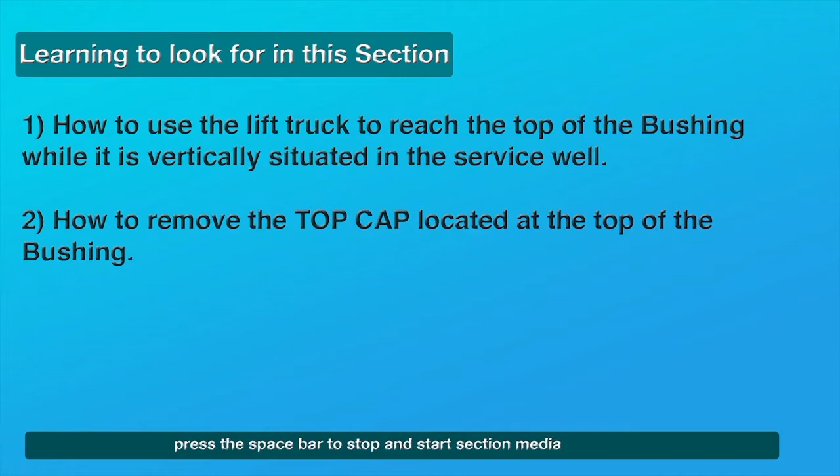Wearing a safety harness, position a scissor lift vehicle just to the edge of the metal floor covering in front of the bushing, so that all of the weight of the lift is on the cement floor.

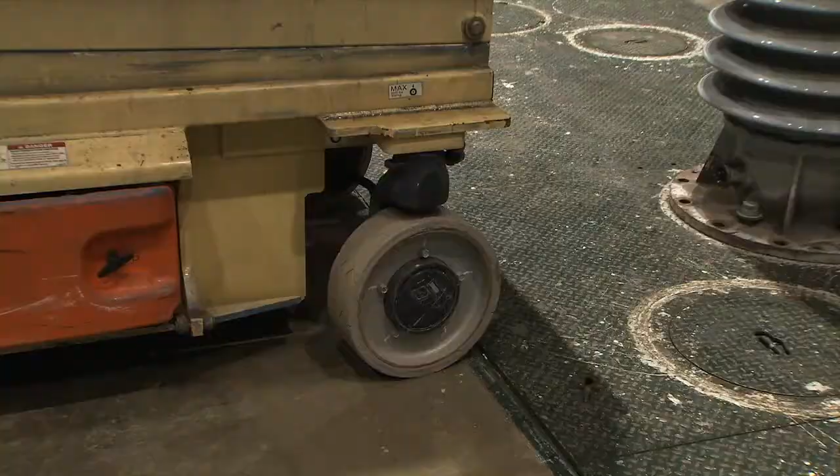Using the handles located on the upper railing of the platform, extend the working platform towards the bushing so that there is a safe and comfortable working distance between the porcelain on the bushing and the platform. Attach the hook of the lanyard on the safety harness to the anchor point on the main railing before stepping

onto the extension platform. Check again to ensure that the scissor lift vehicle is positioned between the metal floor and the yellow line on the concrete floor. The front wheels of the vehicle should not be touching the metal floor.

Using the control panel mounted on the railing, begin raising the working platform. He's raising the skyjack now. He's going to raise the platform to a position where it will be safe and comfortable to work at the level of the bushing where the terminal is located.

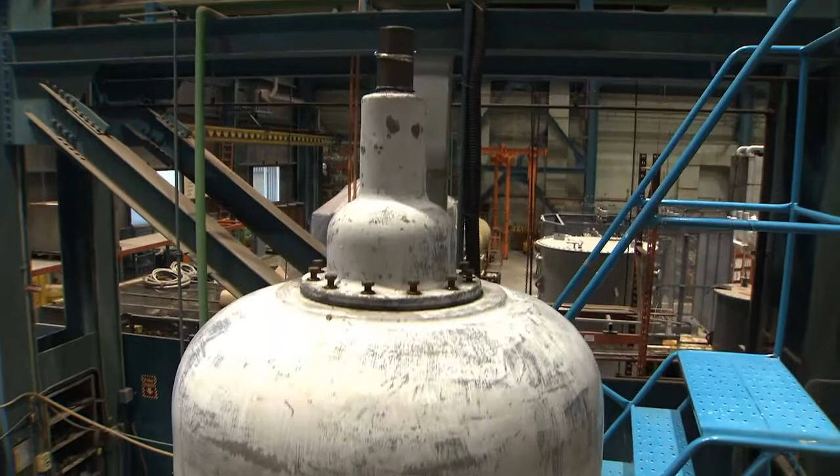Using the appropriate size ratchet wrench, begin loosening the bolts at the base of the terminal that secure it to the oil reservoir tank. When all the bolts are loosened, manually remove both the bolts and the washers, then set them aside for future use.

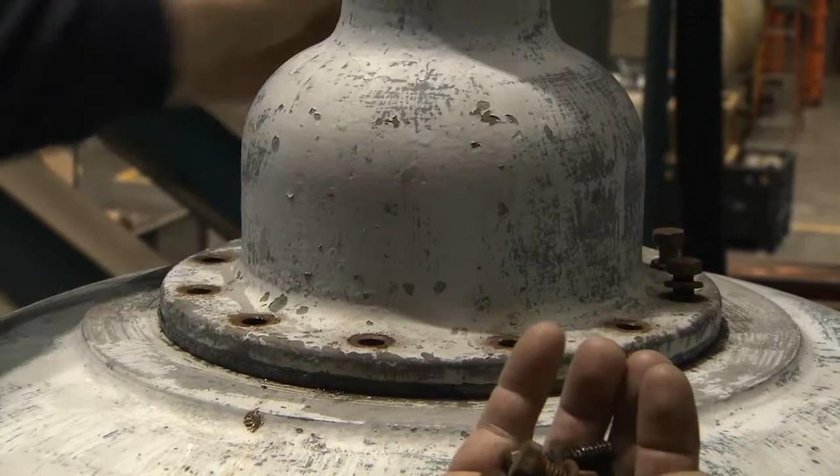Lift the terminal off of the top of the bushing and set it on the surface of the working platform. The draw lead conductor from the transformer extends through the center of the bushing inside the conductor core to make contact with the terminal at the top of the bushing.

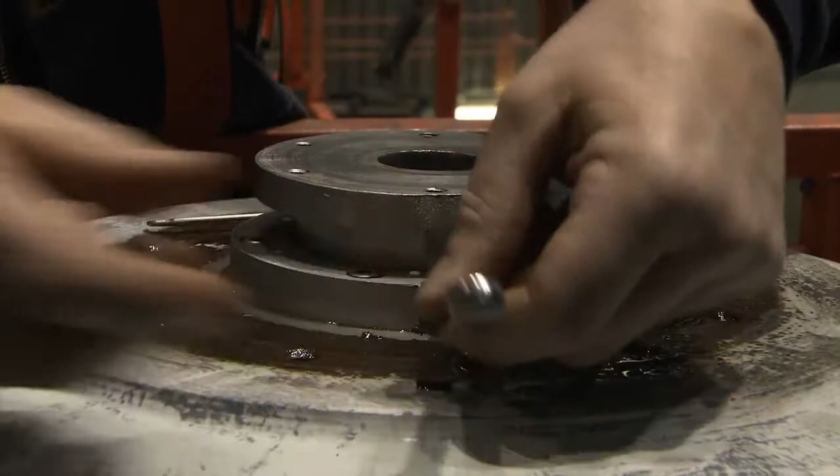Lifting the bushing out of the service well, moving it north toward the scrap oil tank. While on the working platform of the scissor lift, use an open-end wrench, in this case 3/8 inches, to loosen the plug on the top of the oil reservoir tank, situated at the top of the bushing.

The plug lies within a notch in the neck of the metal collar, under the flange attached to the conductor core. Once loosened, manually remove it and safely store it for future use. The plug is for an outlet that can be used in several different ways depending on the circumstances. In this case, it must be removed to replace the volume of air that the oil will displace when the

bushing is drained. Over time, the gasket at the bottom of the plug will break down in the presence of oil and higher temperatures. Use a screwdriver as needed to clean away and remove any pieces of the old gasket that remain at the base of the threads.

Choke one sling around the bushing above the first shed and below the oil reservoir by looping one end of the sling through the opposite end, and then tightening it to choke the bushing. Probably only about 200 to 300 pounds of pressure on that sling.

Choke a second sling on top of the first sling and tighten so that the free end is positioned exactly opposite the free end of the first sling. Raise the platform of the skyjack. Arrange the two loose ends so that they are resting on top of the oil reservoir.

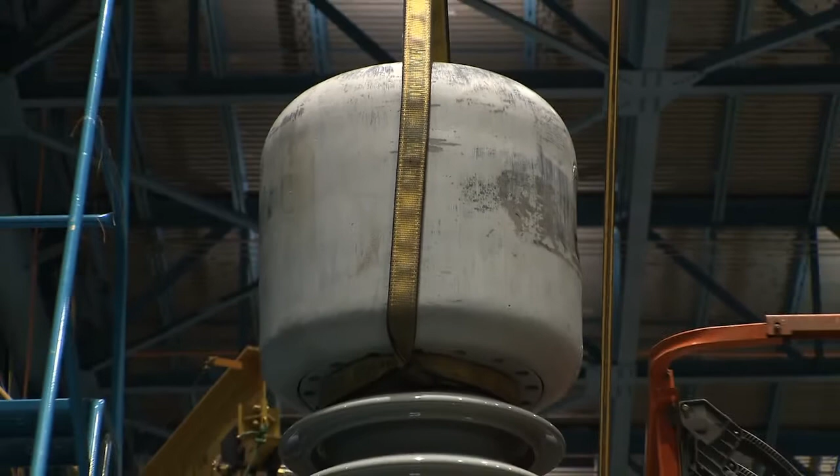The crane operator should slowly remove any slack in the slings and raise the bushing for the sole purpose of determining whether there will be an even distribution of weight when fully lifted. If the bushing tilts when lifted slightly, adjust the position of the slings accordingly to ensure an even distribution of weight. Pretty good there, Lloyd.

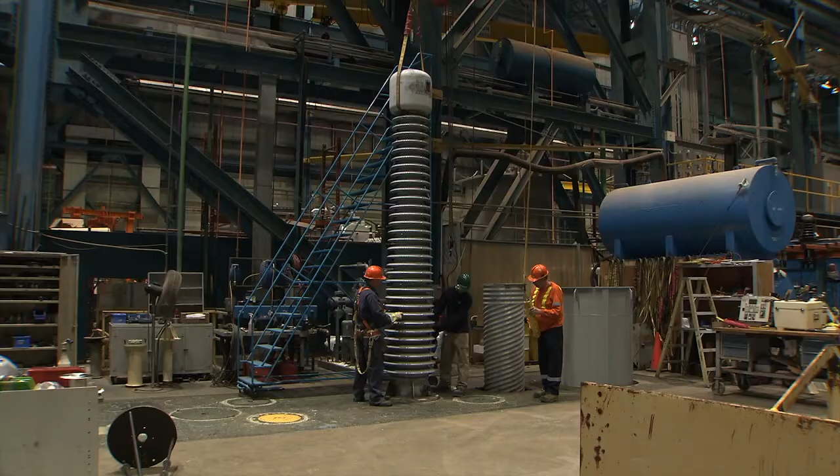When the bushing is lifted just barely off the ground and it remains straight without shifting, the slings are in proper alignment. Just barely touching the floor right now. Prior to lifting the bushing, remove the scissor lift from the area and ensure that there are 2 team members at the base of the bushing.

As the bushing is lifted, 1 team member should guide the unit as it rises to prevent any contact of the lower porcelain with the sides of the service well. Yep. Slowly lift the bushing straight up until the bottom is approximately 1 foot above the floor.

Okay, I'm clear there? Yep. All right. Okay, we're going to start heading north. And slowly begin moving it to the north a few feet and then stopping. As soon as possible, the other team members should put the cover back on the service well.

Begin moving the bushing northbound again toward the blue scrap oil storage tank. Both team members should gently guide the moving bushing with both hands on the flange or the ground sleeve below it. Okay, going north. Move the bushing to within approximately 2 feet of the scrap oil storage tank. Stop the movement.

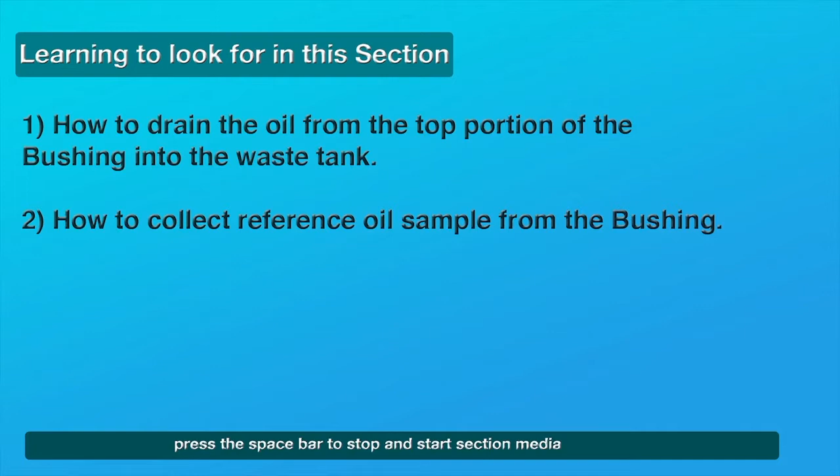Draining the oil from the upper part of the bushing and taking an oil sample for analysis. The tank used to store scrap oil is located at the north end of the bushing shop and has a large circular opening at the top of the tank into which scrap oil from the bushing will be drained.

Using the appropriate size socket wrench, loosen the nuts that hold the cover to the oil sample valve in place. Once loose, manually remove them and store in a safe place for future use. Loosen the cap manually to reduce the amount of adhesion due to the amount of debris mixed with oil that has hardened over the bushing while it was in service.

Place an oil-absorbent cloth beneath the valve before removing the cover to absorb any oil that may flow out when the cap is removed. Unscrew the remaining loosened bolts by hand and remove the cap so that the valve is now accessible. In this case, the valve is a quick connect type, similar to one used in a compressed air line.

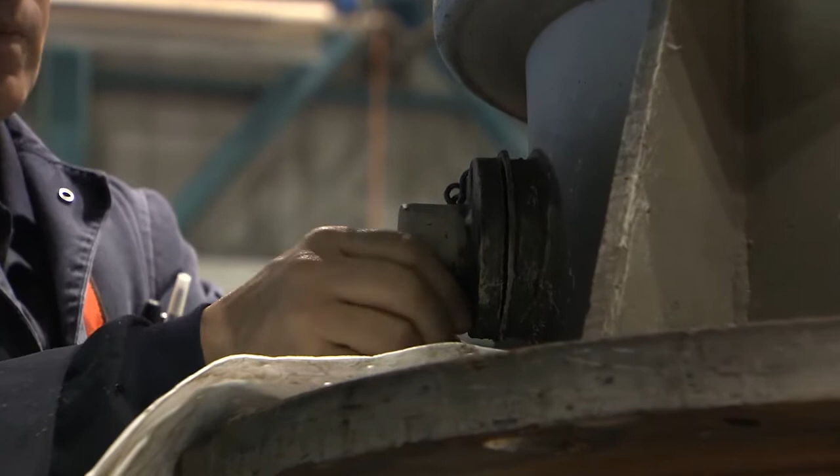Yeah. Now this is one of those things where, actually now you can see the connection there. It's just like a quick connect for an airline.

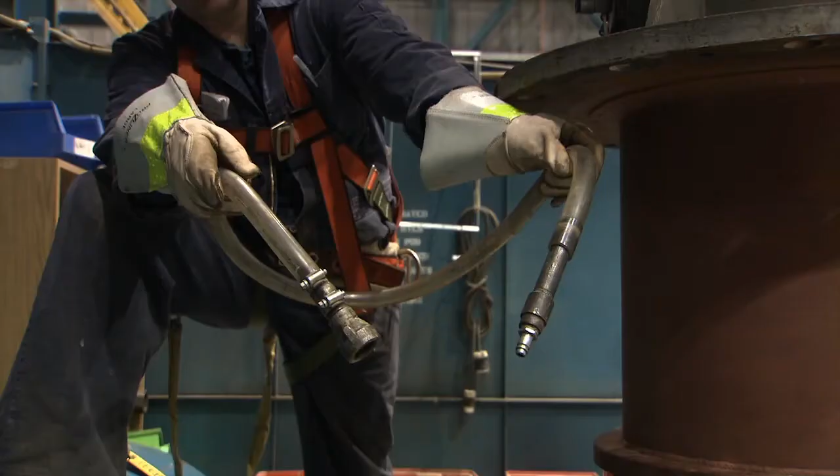One end of the hose used to drain the oil will be inserted into the scrap oil tank, such that it just remains resting on the side of the opening. The other end of the hose is equipped with a connector that will snap into the quick connect fitting on the flange. When the connection has been made, check to see if there is oil flow inside the hose.

So if it doesn't fit, you have different... Yeah, we're good. It's gotta fit. Yeah, now you can see the oil flowing out if you want.

If the oil is flowing out at a steady rate, check on the integrity of the connection by pulling back on the hose. The oil will drain into the tank while it remains upright, supported by the slings and resting on the plywood support at the bottom. Look from this end and then down. And just follow it down to the other end. That's good.

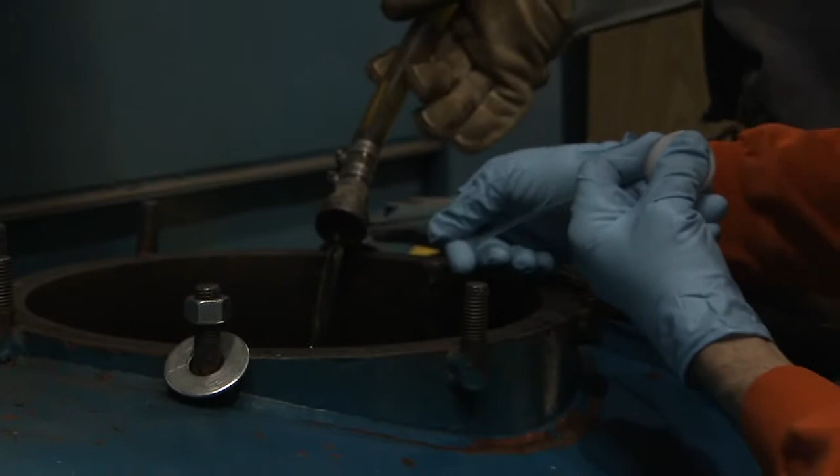While wearing appropriate gloves and using a plastic sample bottle equipped with a length of clear plastic tubing, withdraw a sample of the oil as it flows into the scrap oil tank. Depress the bottom of the plastic bottle while simultaneously immersing the end of the plastic tubing into the stream of oil draining out of the hose.

By letting the bottle expand, the oil will be pulled through the tubing and into the bottle. Draw off enough oil to nearly fill the plastic sample bottle. Transfer the oil to a clear glass vial that has been wrapped with tape so that it can be labeled. Fill the vial to the top before screwing the top on.

And that's it. So now I'm just going to take this cap, we're going to seal it. Just leave it there. Okay. And that's our oil sample for this bushing. Using a permanent marker, write the serial number of the bushing on the tape wrapped around the vial.

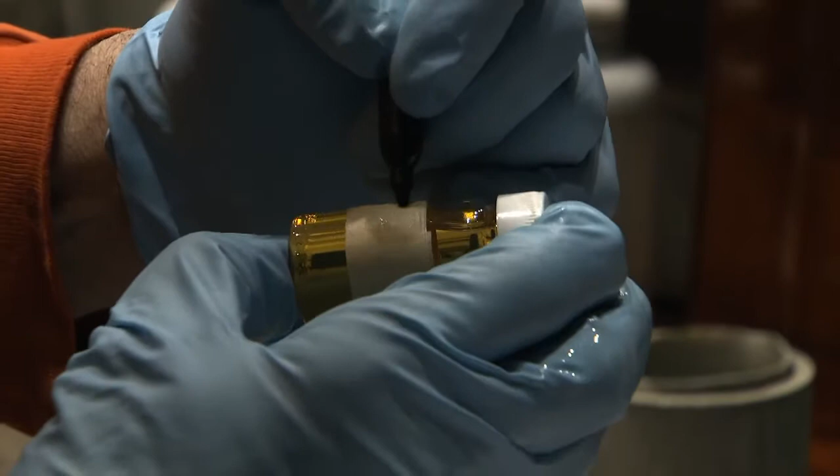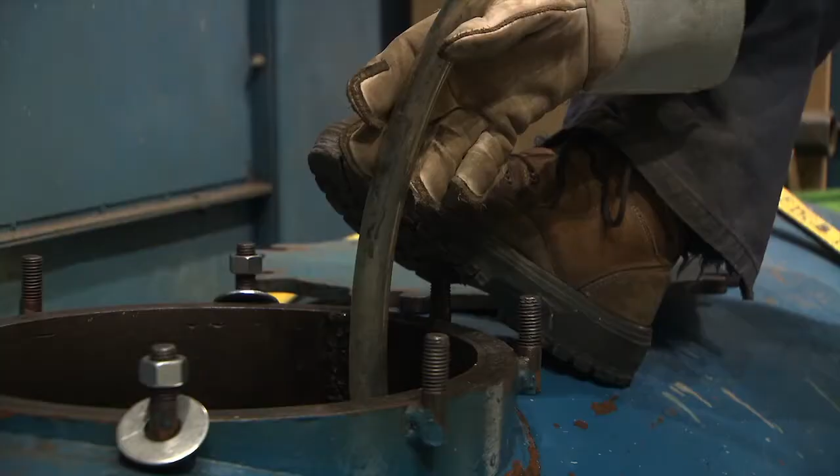And that's it. Just like that. Hold it real still there. And just rotate it. Yep. Good. Check to see if the oil has fully drained from the top half of the bushing by inspecting the end of the hose.

And go ahead. When the flow has stopped, disconnect the hose from the bushing and lay some absorbent towels under the quick connect valve to prevent any residual oil from accumulating. Right.

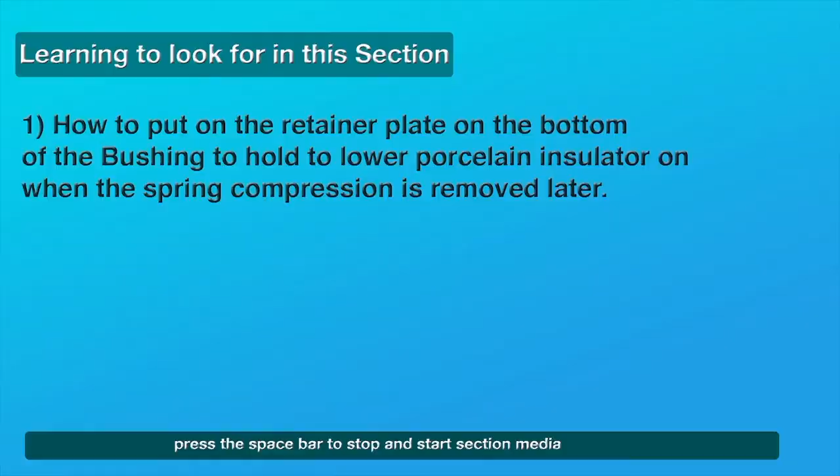Attaching the retainer plate to the flange to support the lower porcelain after the compression system is removed. After the oil in the top half of the bushing has been drained and a sample has been taken for testing, the bushing can be raised up off the block of wood on the floor and moved south above the metal flooring to a point above the service well where it will next be stationed upright.

The purpose of the retainer plate is to hold in place the bottom flange of the conductor core below the lower porcelain. During normal operation, all the parts of the bushing are held together by downward pressure exerted by the compression system at the top. During refurbishment, the pressure mechanism is temporarily removed for servicing, and the retainer plate is required to keep the bottom half of the bushing attached.

Unscrew and remove the large nuts and washers on each of the 3 rods that are attached to the bottom plate. Slide the retainer plate under the bushing, being careful not to chip the porcelain on the lower half. Adjust the position of the plate so that the holes on the flange are directly aligned with the rods attached to the plate, and that the rods are spaced evenly.

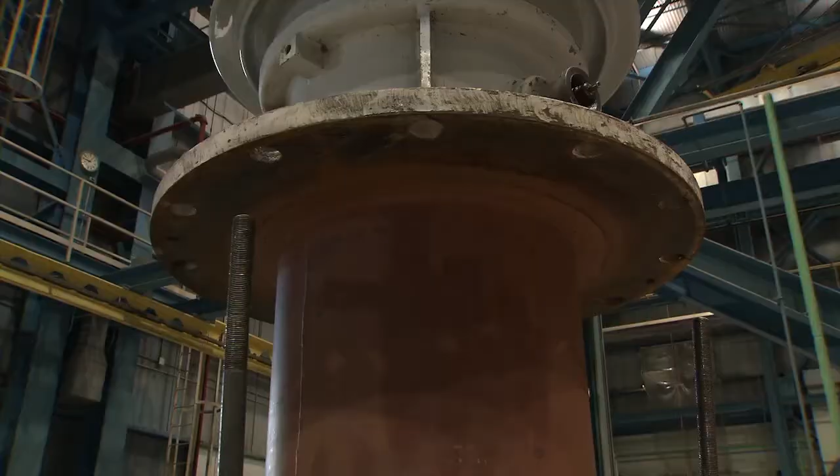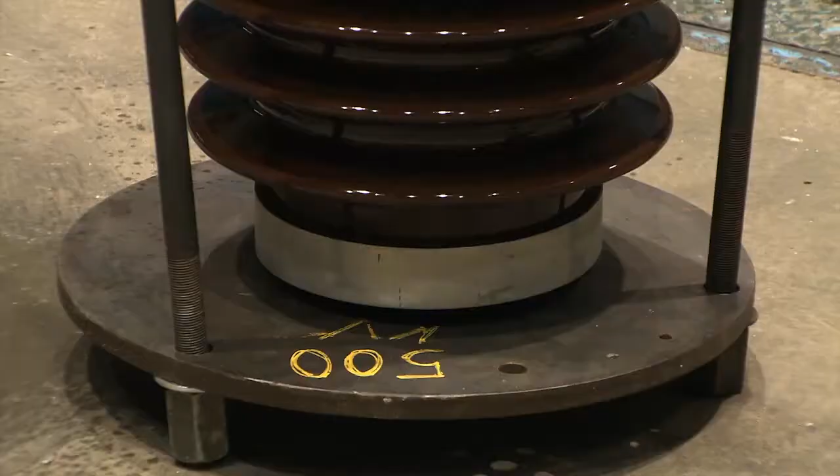Begin lowering the bushing so that the rods penetrate the holes that were previously aligned. Lower the bushing so that the bottom flange of the bushing rests on the retainer plate. Gather the 3 nuts and washers that were previously removed, and then place a washer on each rod that extends through the flange. Hand tighten a nut to each rod after the washers have been applied.

Using an adjustable wrench, tighten each nut so that the plate below is firmly attached and supports the small flange at the bottom of the bushing.

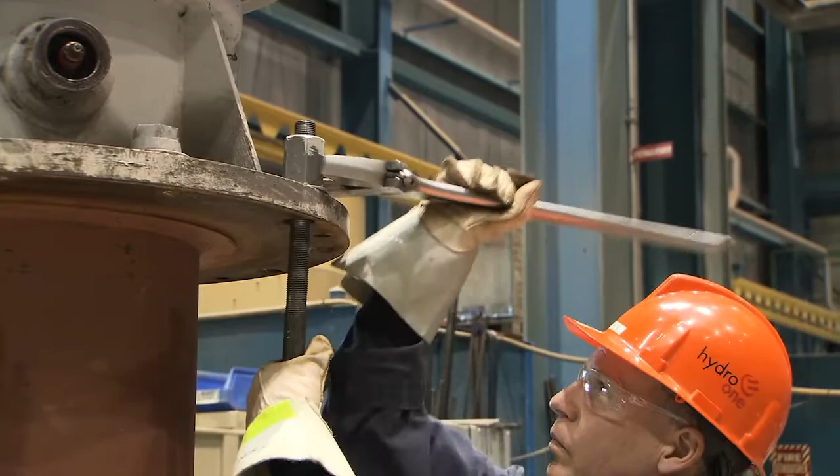Replacing the bushing into the service well after the retainer plate has been attached to the flange. Notches have been cut out around the perimeter of the well so that the rods rising from the bottom will not interfere with how the bushing is seated. Okay, I'm taking it east. Slowly raise the bushing off the ground and move it eastward until it is almost at the edge of the designated well.

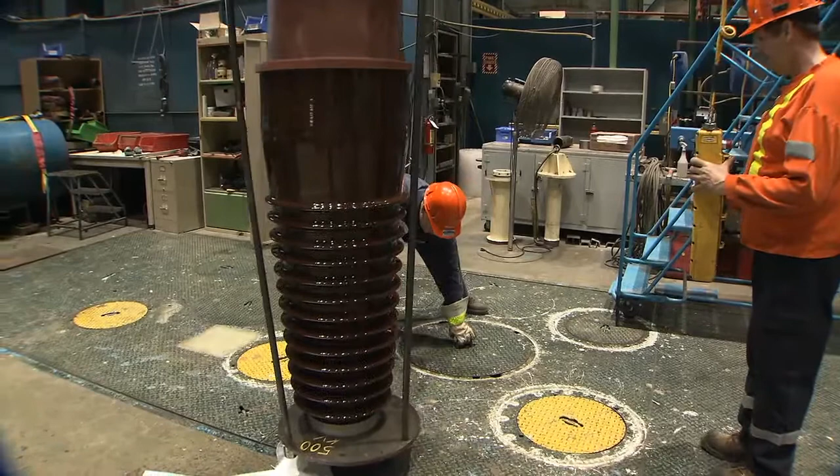Okay, gonna continue east. When the bushing has stopped, a team member should remove the cover on the well and store it in the appropriate area away from the designated work area. Resume moving the bushing eastward until it is directly over the opening of the well. Take it down. And we're just going to line up those rods with those notches in the floor.

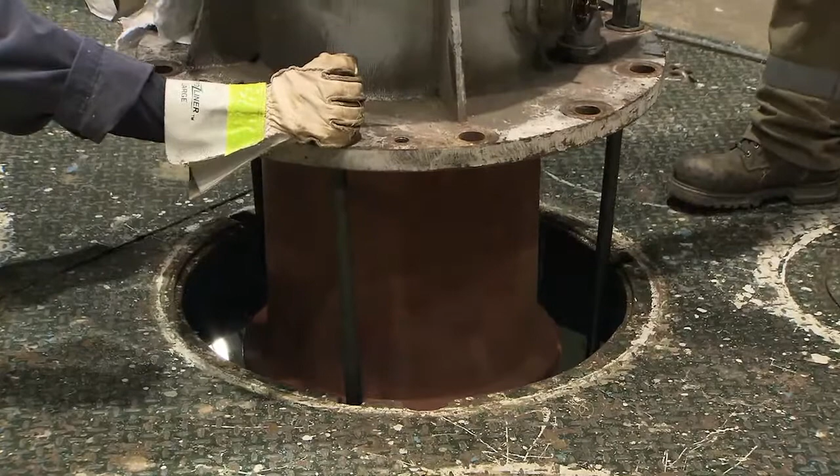With a team member on either side of the bushing, align the position of the rods on the retainer plate with the position of notches around the perimeter of the service well. With both team members guiding it, lower the bushing down into the well, avoiding any contact with the edges of the metal floor. The width of the notches around the perimeter of the bay may differ, because other types of bushings may use rods of a different thickness. Okay, there you are. For this reason, it is important to ensure alignment with the appropriate set of notches as the bushing is descending.

Okay. After the bushing is seated correctly in the service well, use the rolling warehouse ladder equipped with handrails and with the locking mechanism activated to remove both slings that were used to raise the bushing with the crane.

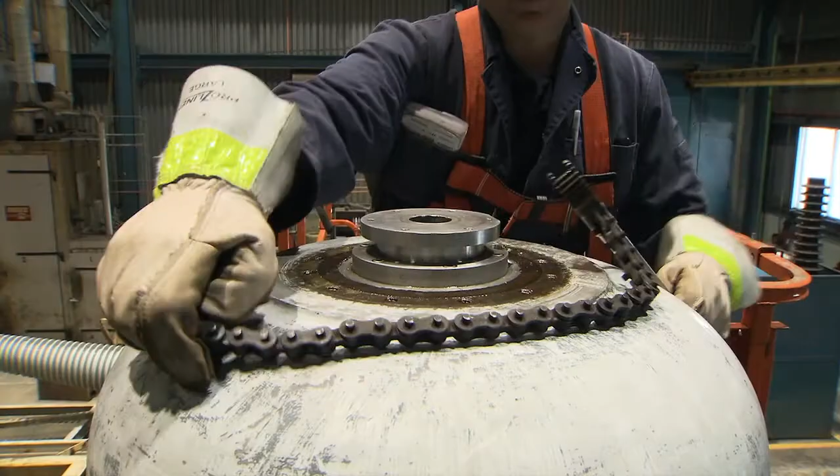Removing the oil reservoir tank from the upper part of the bushing. In order to remove the oil reservoir tank at the top of the bushing, the proper set of tools should be ready and available for easy access. They include a chain wrench, shown on the left, as well as a combination wrench that is open-ended at one end and has a ratchet on the other end. 2 hex keys that fit the ratchet will also be required. A couple of sets of Allen keys of various sizes are also recommended.

On the top of the oil reservoir, a round flange approximately 6 inches in diameter and 1 inch thick is screwed into the metal conductor core that penetrates the entire length of the bushing. The flange acts as a portal through which the draw lead from the transformer can pass through the oil reservoir tank and make contact with the terminal at the top.

Torque the flange using the chain wrench in a counterclockwise direction to loosen it. Once loosened, begin to manually unscrew it using both hands. Once removed, notice the O-ring at the top of the threads on the underside of the flange. All of the gaskets and seals will be replaced as part of the refurbishment process.

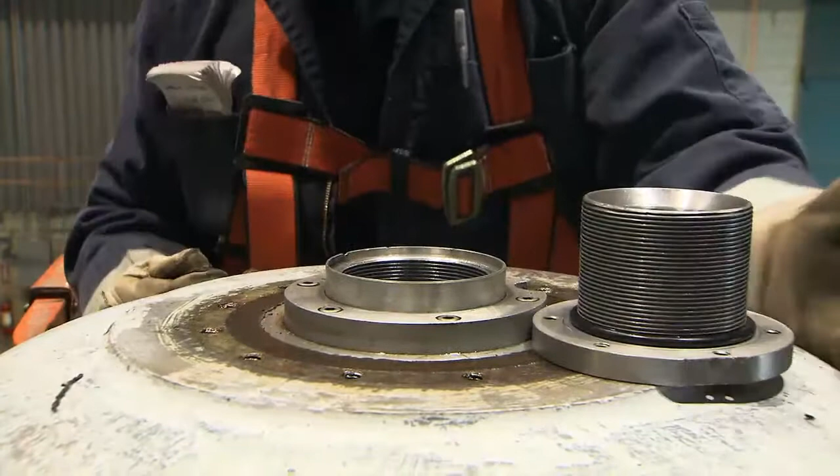Underneath the flange lies a metal collar surrounding the metal conductor core below the flange. The purpose of the collar is to firmly hold in place a black O-ring seal that prevents oil from leaking out from around the conductor core above the oil reservoir. Using the appropriate size Allen key, remove all of the screws on the surface of the collar.

Also, be aware of the fact that there is a metal washer for each screw, and they must also be removed. When the washer is retrieved, place it over the screw to ensure it doesn't get misplaced. When all of the screws are removed, lift the collar off the surface of the oil reservoir, and then remove the black O-ring that surrounds the conductor core.

Place all the screws, with the washers attached, back into the collar that was removed, and set it aside together with the gasket until it's time to reassemble the bushing. At the base of the oil reservoir, there are a series of headless hexagonal grub screws that are used to attach the reservoir to a collar that surrounds the bushing at the top. These screws must be removed using the ratchet end of the combination wrench.

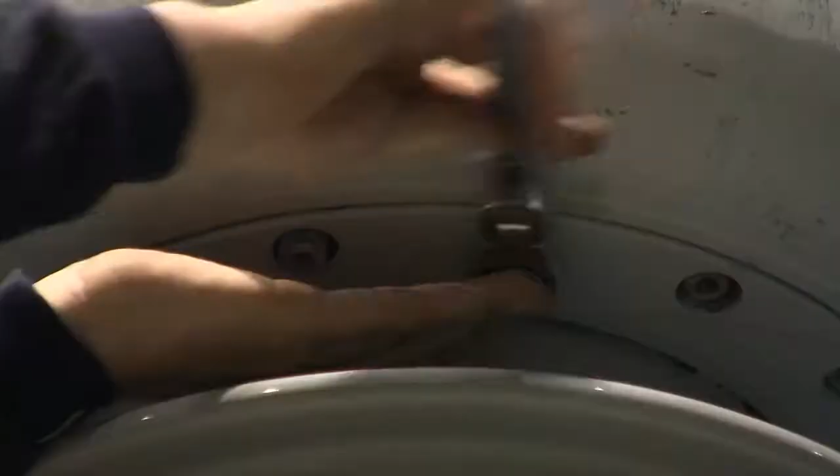Insert the hex key into the ratchet, and then, by keeping a finger on the key, insert the male end of the key into the grub screw and unscrew until there is enough of the screw exposed so that it can be removed manually. Repeat this process for every screw until they have all been removed, leaving the oil reservoir resting on the collar surrounding the bushing.

Return to the top of the reservoir and insert 2 externally and internally threaded inserts in opposing holes 180 degrees apart that were previously used to secure the terminal to the reservoir tank. Into each insert, screw an appropriately sized eye bolt strong enough to support the weight of the reservoir after it has been suspended. Loop one end of a sling designed for a specific working load limit to a metal shackle,

and then connect the shackle to the eye bolt by screwing a threaded connector bolt through the eye bolt while connecting both ends of the shackle. Repeat this process for the opposite eye bolt.

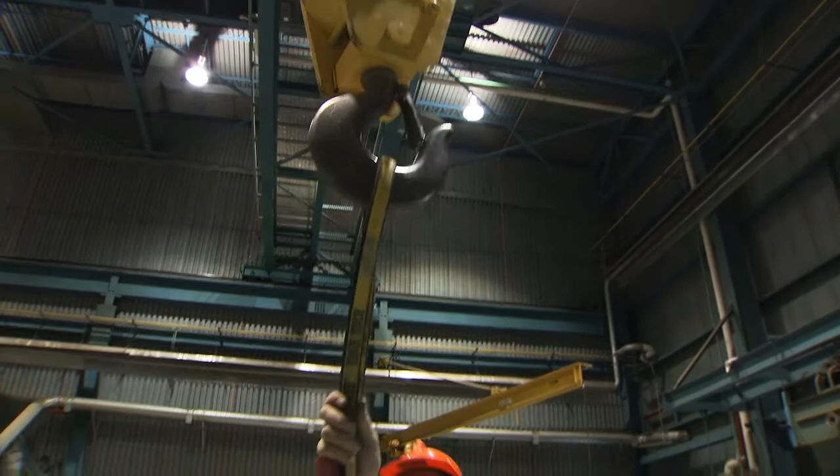So when he's ready, I'm gonna lower the hook down. Okay. And lift it off, and we're gonna lift the can right off and just bring it across, and we're gonna lower it down right here. And then signal to the crane operator to lower the crane hook closer to the hitching point above the reservoir. Hitch the sling to the hoist hook only after it is within a comfortable reach, and then hand signal to the crane operator to begin lifting the reservoir tank.

Okay, we're going up. As the tank is lifted, the team member on the scissor lift should use both hands to help guide it off the conductor core. It's a very tight fit. Be very careful, there's oil in that can still. It is important to minimize any sway or tilt in the upward motion, as there is still approximately 1 inch of oil around the outside edge of the reservoir tank on the inside.

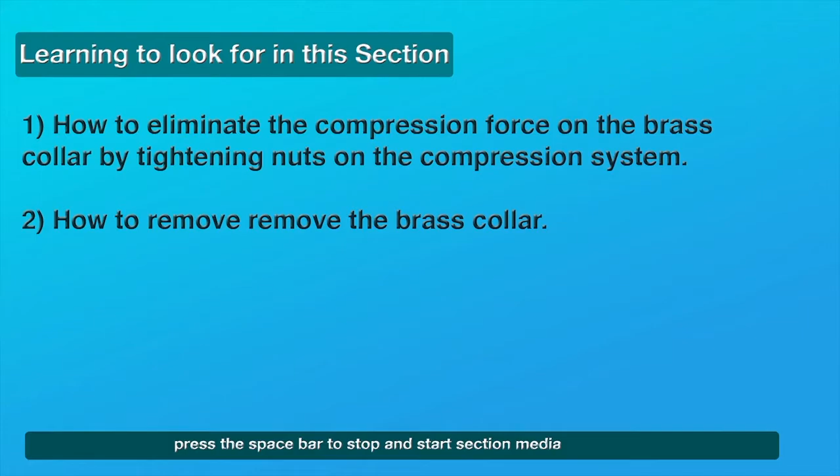There's about 1 inch of oil around the outside edge of that can on the inside. So if we slosh it at all, it's going to come splashing down on us. Reducing the pressure exerted by the compression system and the removal of the large brass nut or collar. The purpose of the compression system is to keep all the parts of the bushing tightly compressed and held securely together as a single unit.

Place the appropriate size washer on each bolt and then hand tighten a nut over the washer. In normal operation, the springs exert a force on the plate above them that pushes against the brass nut that is threaded to the conductor core. This causes a downward pressure between the brass nut at the top of the bushing and the flange on the conductor core at the very bottom of the bushing.

In order to remove the brass nut from the top of the conductor core, it is necessary to back off the pressure exerted on it by the springs in the compression system that push up against it. A series of threaded bolts that extend through the plate above each spring make it possible to adjust this pressure. When all of the nuts have been hand tightened, use a hex ring spanner wrench to tighten them further to ease the pressure off the large brass nut on the core so that it can begin to turn counterclockwise.

Tightening the nuts about 1/8 of an inch using the wrench is usually enough to allow the large brass nut to turn. This is equivalent to approximately a 200 to 300 pound pressure reduction. The total downward pressure exerted by the springs in the compression system is approximately 3,000 to 3,500 pounds.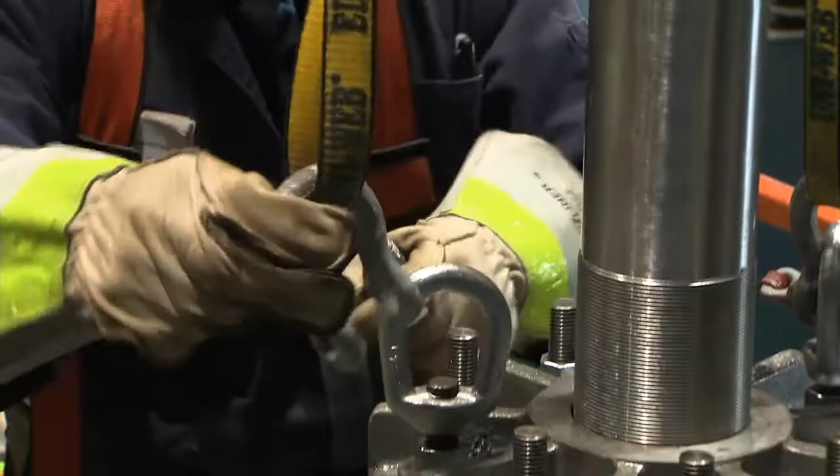To remove the compression system from the bushing, choose 2 of the threaded bolts that are 180 degrees opposite from each other, and onto each bolt, attach a large threaded galvanized eye nut that screws onto each threaded bolt. The eye nut must be strong enough to support the weight of the compression system after it has been suspended.

Loop one end of a sling designed for a specific working load limit to a metal shackle, and then connect the shackle to the eye nut by screwing a threaded connector bolt through the eye nut while connecting both ends of the shackle. Repeat this process for the opposite eye nut using the other end of the same sling, and then signal to the crane operator to lower the hoist hook closer to the hitching point above the compression system. Hitch the sling to the hoist hook only after it is within a comfortable reach.

In order to free the compression system from adhesion to the gasket that it is seated on, it will be necessary to heat the bottom plate using an acetylene torch. For this process, it is imperative to wear a half-face air purifying respirator with the appropriate gas vapor cartridges, as well as safety glasses. Using the acetylene torch, heat the area at the base of the springs and around the outside of the bottom plate.

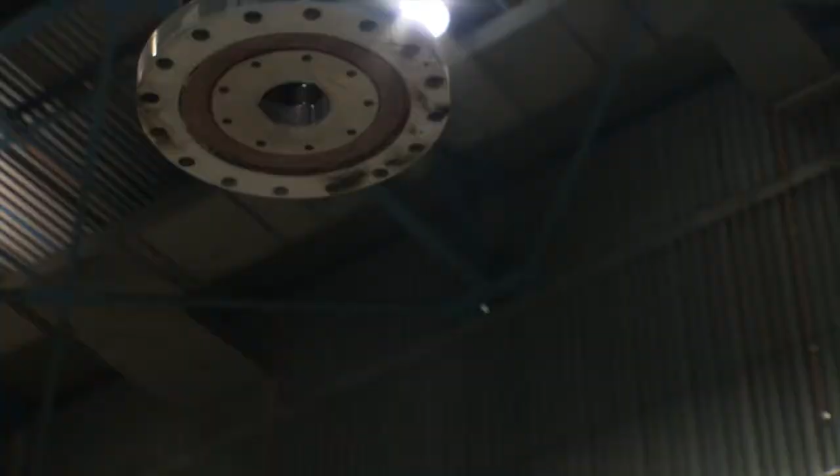When the compression system is off the core, the crane operator can then move the system north and lower it onto a workbench for refurbishment to begin. The area on the workbench should be covered with sheets of oil-absorbent material before it touches down, with the help of a team member guiding it into position. Once it is resting on the bench, remove the sling from the hoist hook.

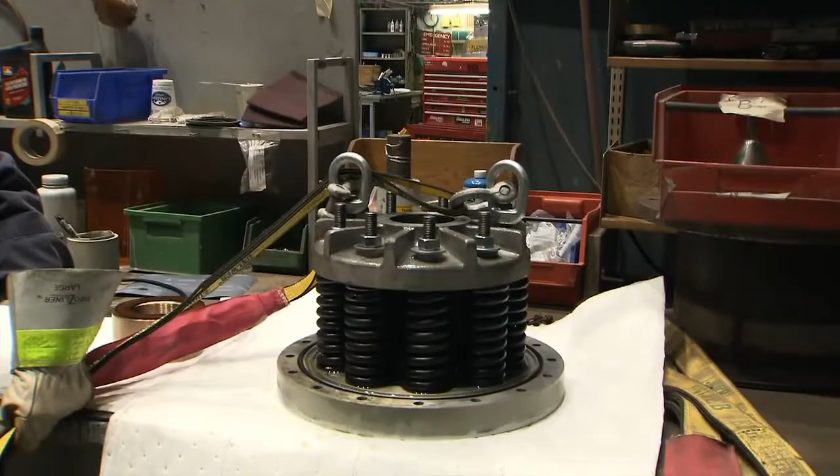Removal of the upper porcelain insulator from the bushing. Choke one 24-foot sling around the porcelain between the third and fourth shed, and choke another 24-foot sling around the porcelain between the second and third shed. Following the same safety protocol as when removing the terminal, raise the working platform of a scissor lift vehicle to the level of the hoist hook and attach the ends of the slings to the hook.

Due to the fact that the choking points are different, each sling will be a different length in relation to the distance from the hoist hook. This could cause the porcelain unit to tilt when lifted and thereby become unsafe. To compensate for the difference in length, a large shackle will be connected to the sling that is shorter.

Remove the shorter sling from the hook and attach a large shackle to the loop on the end. Reconnect the sling to the hook using the attached shackle. Signal to the crane operator to raise the hoist hook to eliminate any slack in the slings.

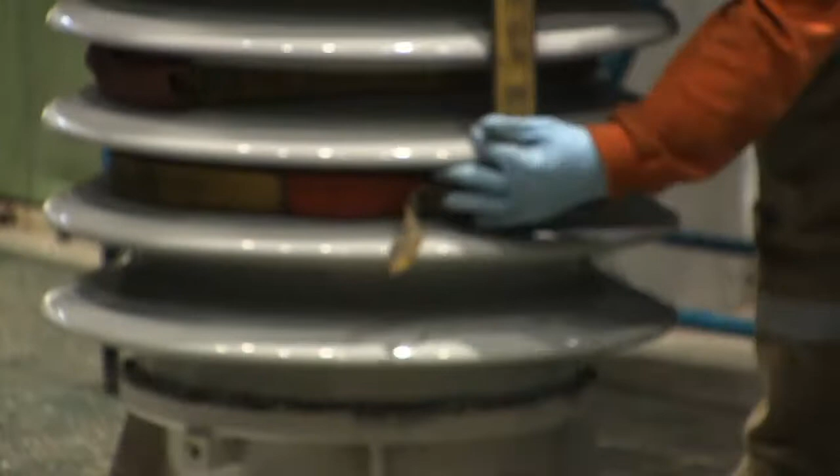Lower the working platform of the scissor lift to a safe and comfortable working position at the level of the top sheds on the porcelain. Wrap a cord of the appropriate size and strength separately around each sling between the two top sheds on the porcelain.

How's that looking? Re-wrap the cord around each sling several times to reduce the possibility of slippage while it is being hoisted.

With the aid of a second team member using the rolling warehouse ladder with handrails and with the locking mechanism activated, begin tying both slings together tightly with the cord. Make sure the knots are as secure as possible.

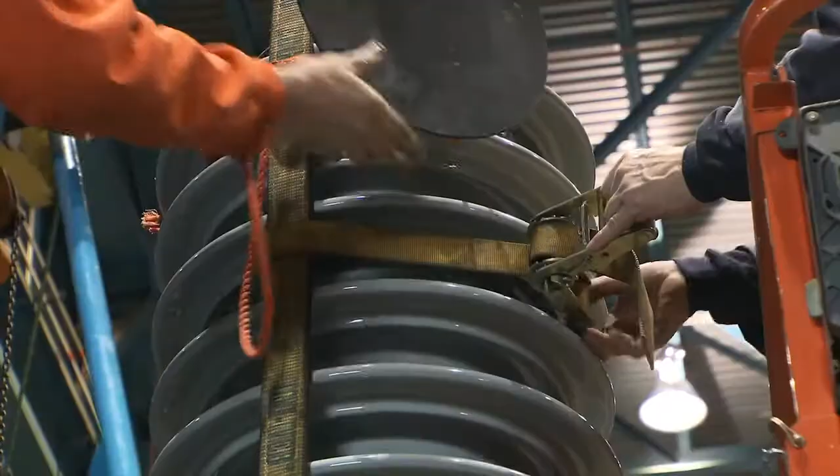To enhance the security on the slings during the hoisting of the porcelain, loosely attach a security belt around the porcelain and over both slings between the third and fourth sheds from the top. Just a little bit. In order to prevent the porcelain from being chipped while being lifted, insert a rubber pad directly under the metal security buckle before it is tightened.

You really can't go too tight on that. Actually, you can. You'd be surprised how tight you can go. Tighten the buckle as much as necessary to prevent any slack in the vertical slings. Okay.

You're good with... The porcelain on the top half of the bushing is seated on a gasket that rests on the top crown of the metal flange. The gasket provides a seal by preventing the oil inside the bushing from escaping. It also protects the porcelain from chipping or cracking while seated on the crown of the flange.

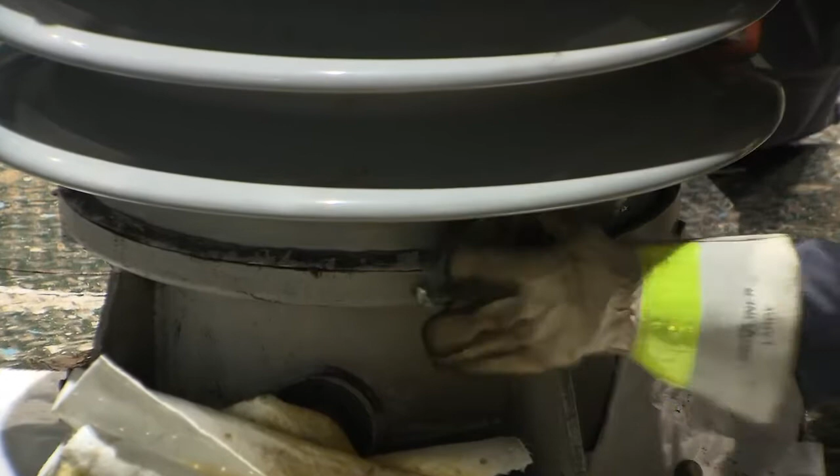Begin removing as much of the hardened gasket material as possible using an appropriate scraper. Over time and with exposure to the elements in nature, the gasket hardens, making it very difficult to separate the porcelain from the flange. Wearing a half-face air purifying respirator with the appropriate gas vapor cartridges, as well as safety glasses, heat the area around and under the flange where it meets the porcelain. Depending on the amount of adhesion, it may take longer using the torch to loosen the bonds that have been formed.

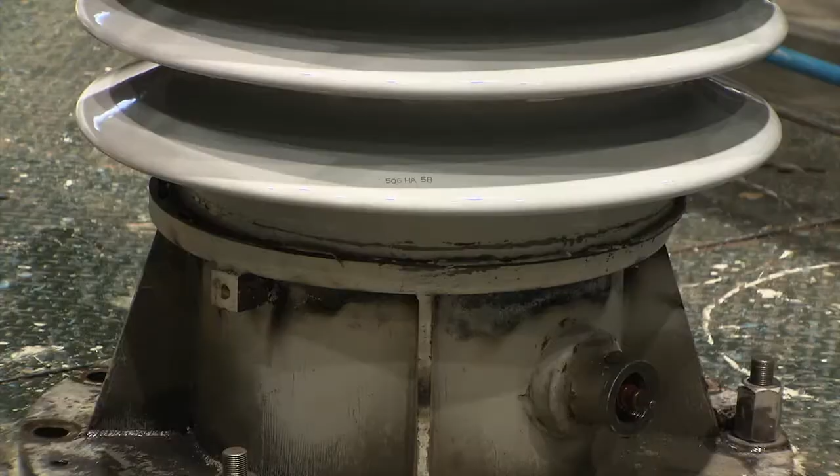By raising the hoist in very small increments, the crane operator can eventually lift the upper porcelain unit away from the flange. With the porcelain suspended just above the flange and before raising the unit all the way off, the bushing team can assess the arrangement for safety, security, and balance.

Using the rolling warehouse ladder with handrails and with the locking mechanism activated, a team member should tape a soft oil-absorbent cloth over the opening of the conductor core prior to the porcelain being lifted over top of it. Since the measuring tolerance for the parts that slide over the conductor core are very small, the end of the core needs to be protected from any kind of damage.

Yep. Okay. Ready, guys? We're going to make the lift. Oil level's good. Yep. Okay. Just keep an eye on the top there. Okay. There's some loose paper.

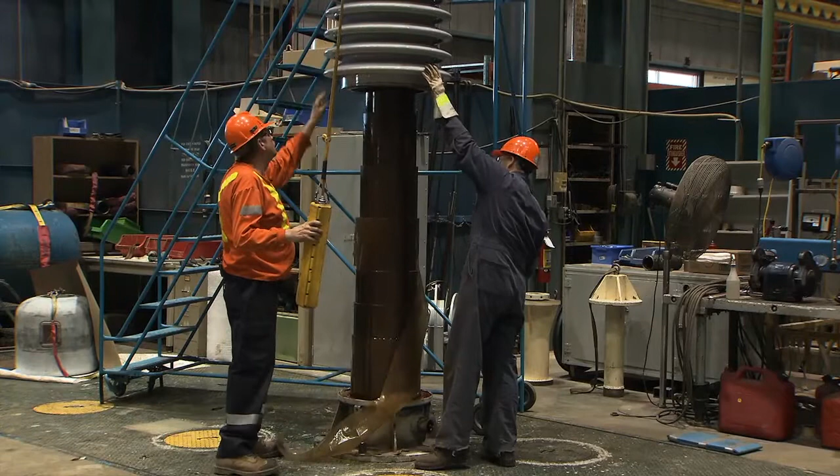I will go east, possibly even a little bit north, I think. I am? Okay. Hang on a second. We're free. Okay. Going up again. That's actually the paper. That's the paper already starting to uncoil. It's a very small amount. We're not too concerned with that.

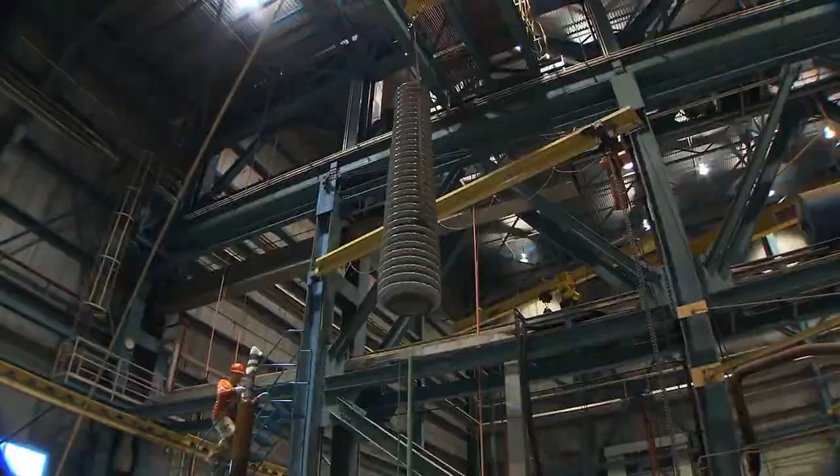Yes, that's what it's all about right now. Okay, I'm just about to clear the core. Nope. Okay, I'm going to bring it down. When the conductor core is cleared, the covering on the top of the conductor core can be removed.

The bushing can then be slowly moved southbound and lowered onto a section of oil-absorbing material placed over the metal flooring where the service wells are located. Yep.

Okay, Graham, I'm going to bring it down now. There we go. Perfect.

Yeah, we'll leave those. In order to be able to lift the conductor core after the porcelain has been lifted off, the large brass nut that was previously removed should be threaded back on. To avoid cross-threading the heavy nut, slowly lower it and gently place it on the threaded section of the conductor core. Turn it counterclockwise first until a subtle clunking sound is heard. This indicates that it is correctly seated on the top thread for clockwise rotation to proceed.

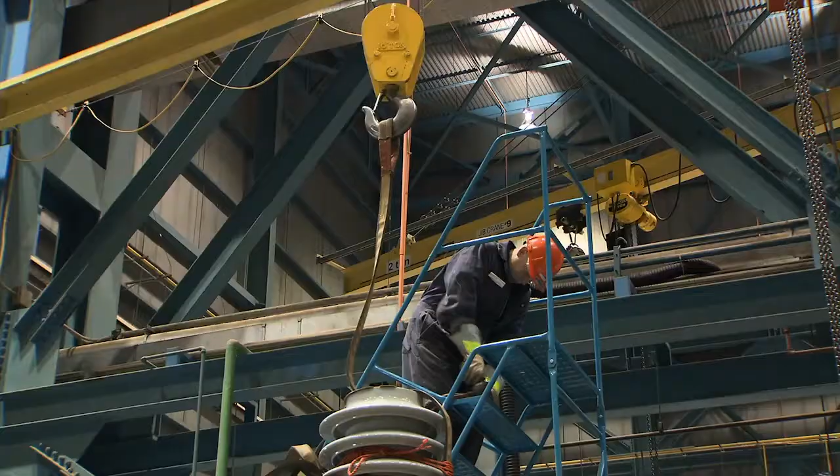The shackle on the end of the shortest sling can now be removed from the hoist hook and safely set aside. The longer sling can then be removed from the hook as well. Draining the oil from the lower part of the bushing.

With the upper porcelain insulator removed, the large brass nut at the top of the conductor core will serve as a choke point when the bushing is lifted to drain the oil from the bottom half. To protect the threads on the conductor core during the lift, and also to protect the sling, a team member should wrap a single layer of oil-absorbent material around the core directly below the large brass nut.

Using the rolling warehouse ladder with handrails and with the locking mechanism activated, loop the sling around the core over the top of the oil-absorbent material, and then tighten it before attaching it to the hoist hook. The team member should hold the sling against the conductor core and in line with one of the 3 rods that are holding the core retaining plate to the bottom of the bushing. The crane operator can then remove any slack in the line by raising the hoist.

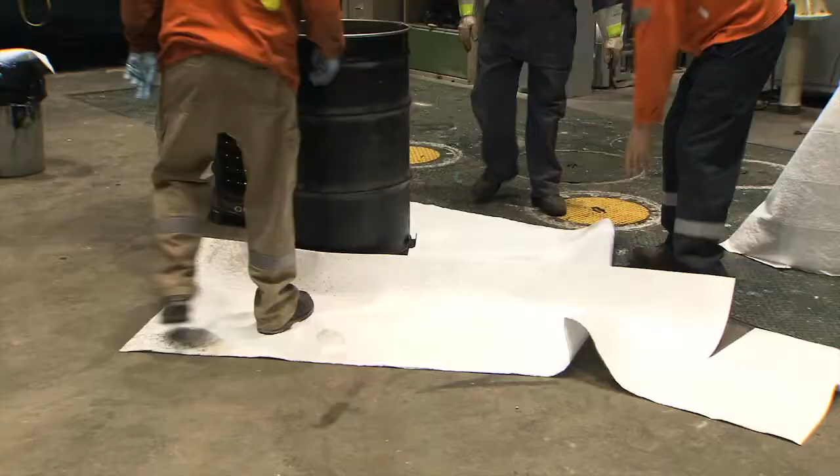The crane operator can begin to lower the tension on the hoist to tilt the bushing slightly toward the 45-gallon drum. Move the drum closer to the base of the bushing. Okay, now it's gonna be messy. Cover the floor on the east and west sides of the drum with sheets of oil-absorbent material so that spilled oil will be absorbed. Have to do, because you're gonna, here, just run it parallel like this. Put this one over here like this.

Lay the sections of material north to south on either side of the drum, but not on the south side, which would prevent the drum from rolling to catch the oil. Now what's going to happen is as we're tipping this thing down, oil will start coming out of here, okay? So what you have to do is keep moving this with it as the angle changes. Okay, and I'm going to start watching what I'm doing.

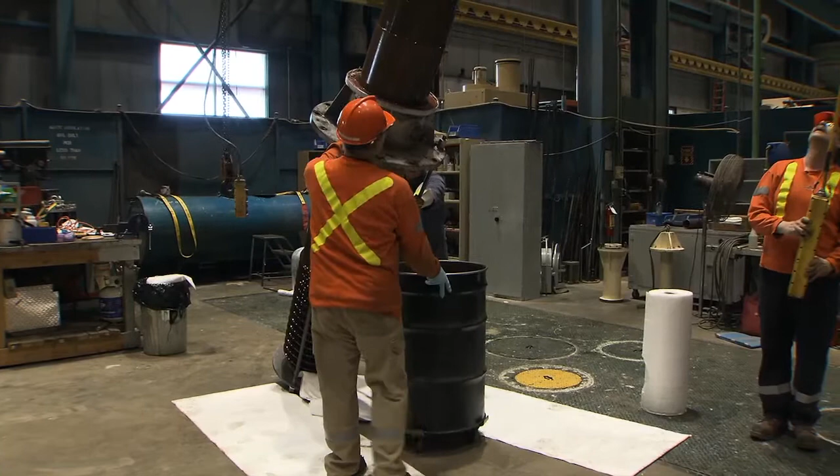At this point, team members should prepare to roll the drum back away from the bushing as the angle changes and oil begins to flow out from between the flange and the main insulation. Other team members should help steady the bushing as it is tilted to prevent spillage. The crane operator can only tilt the bushing to the edge of the drum, and so in order to remove the remaining oil, the bottom of the bushing must be raised higher.

We're just reaching a point, we just want to get as much oil as we can out before we hook up the jib. Okay. That's about as far as we can go right there. Just to the top of the oil. That's it. Re-choke the sling that was previously attached at the base of the bushing, and then attach the free end to the hoist hook on the jib crane.

Removing the conductor core. The central core of the bushing consists of a metal inner conductor core that is surrounded by an outer metal core over which paper insulation is wound. Cardboard sleeves placed between the two cores are what determines the space between them.

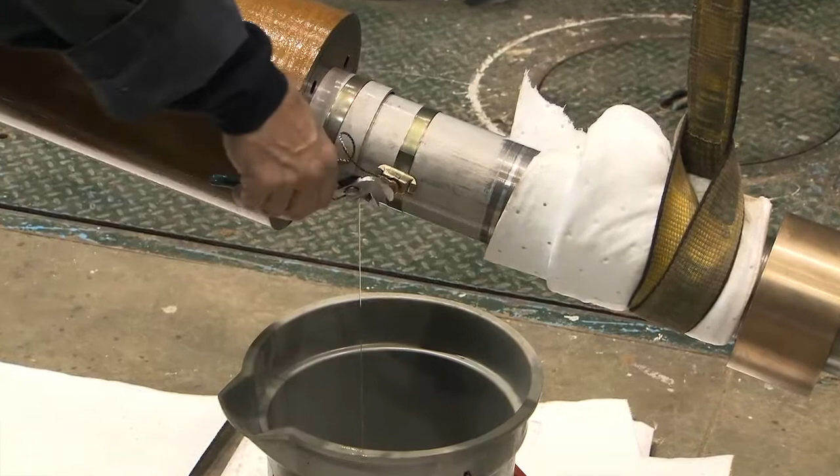To begin the process of removing the inner conductor core, place a small bucket underneath the top of the outer core to collect the residual oil that may flow out from between the cores. The wire connecting both cores is designed to ensure that they both have the same electrical potential. During regular operation, the draw lead from the transformer travels the length of the inner conductor core, and so by making the potential the same for the outer core, accurate testing can be performed through the capacitance tap.

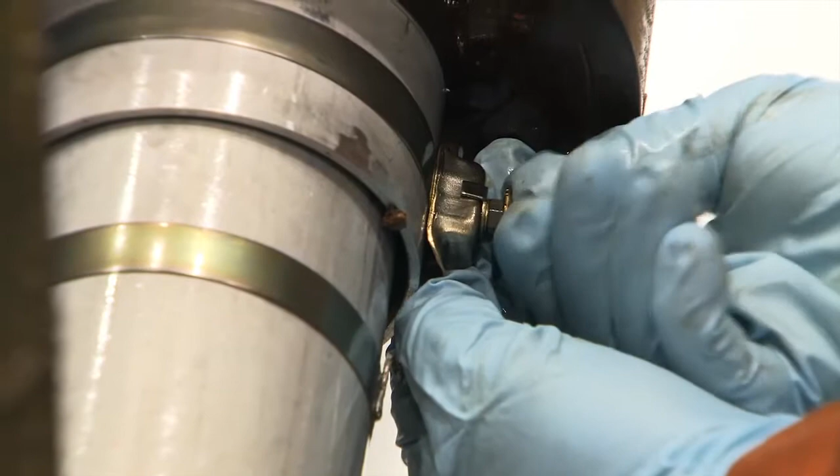Screw the nut and washer that held the lead wire in place back on the bolt, but loosely, simply to prevent them from being lost. Now that's going to be loose enough just to slide off when we have to take it off. We'll just slide that right off of here. Because it's accessible to us right now, this is why we're going to take care of it right now.

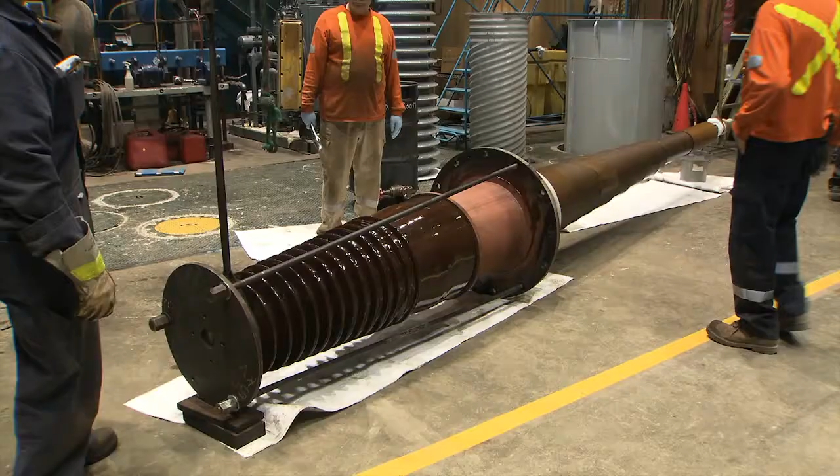To remove the conductor core, the retainer plate must first be removed from the bottom of the bushing. Then the porcelain insulator must be lifted up just enough to take the weight off of the conductor core that passes through the center of it. Once the weight is off, the core can then slide out the bottom end. Looks good to me. 2 slings must be choked at each end of the porcelain and then attached to the hoist hook so that it can be raised up and supported. There must also be enough space at the bottom end of the bushing so that the conductor core will clear the bottom of the porcelain insulator completely.

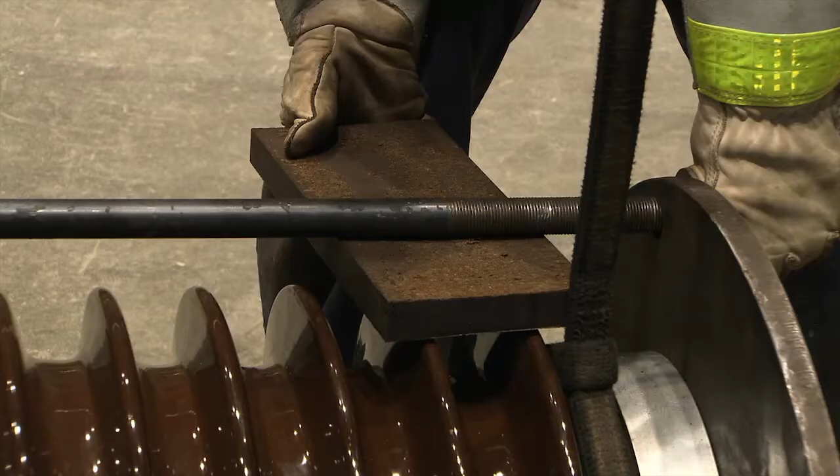When the bottom end of the bushing is raised, the top end will need to be supported. For this purpose, a wooden support frame that has been covered with a sheet of oil-absorbent material will be used. Begin removing the bottom conductor core retainer plate by first holding a piece of plywood between the porcelain and a metal rod that runs lengthwise along the top. The plywood serves to protect the porcelain below from the rod above when the rod is removed.

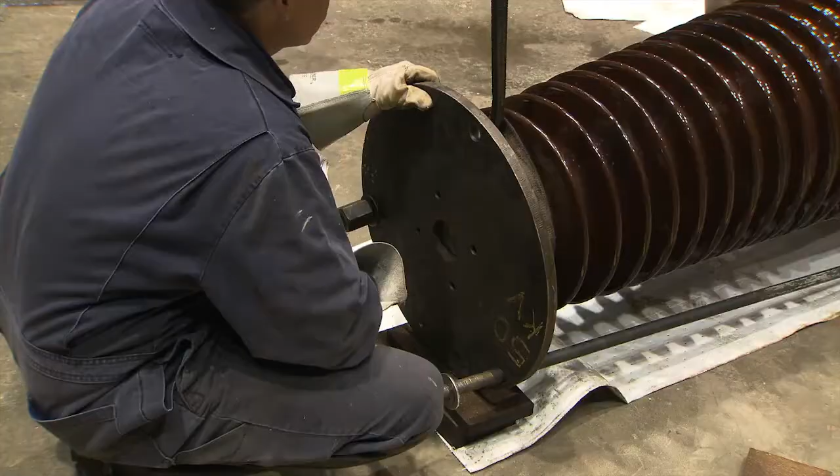Keep the plywood in place for the time it takes a team member to loosen the large nut at the other end using an adjustable wrench. Once the bolt has been unfastened, the rod can slide out the bottom end. Loosen the large nut for the rod running up the side of the porcelain and remove the nut at the top of the flange. For the rods that run up the side of the porcelain, the plywood is not necessary, because when the rod becomes unfastened, it will fall to the floor rather than on the insulator.

When the retaining plate has been removed, the sling at the bottom can also be removed. Attach and choke a sling just above the top shed of the porcelain, and choke the other end of the same sling between the 3rd and 4th shed on the bottom half of the bushing. Just gonna slide this portion off right here. Remove the band on the inner core by sliding it gently all the way off the top of the core.

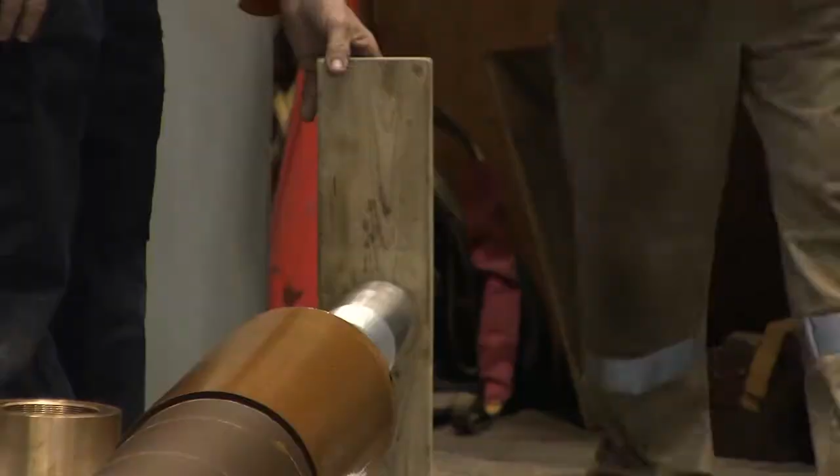Double-check the locations of where the sling is choked around the porcelain after the slack has been removed, and then lift the porcelain up just enough to remove the weight off the core. Quite good like that. I'll even hold it for you.

We'll wait until he starts smoking. Yeah, so I've already removed this.

In order to free the bottom flange on the conductor core from sticking to the porcelain, use an acetylene torch to heat up the bottom plate. It is imperative to wear a half-face air purifying respirator with the appropriate gas vapor cartridges, as well as safety glasses when using the torch.

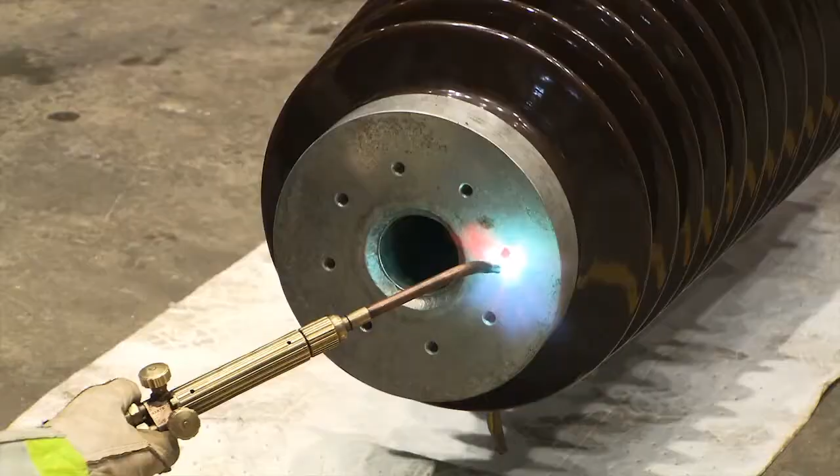Once we see some smoke coming from that flange, we'll know that the heat has made it through to the gasket, and then... Using the acetylene torch, heat the entire surface of the bottom flange. The first sign of smoke indicates that the heat has penetrated to the gasket on the other side of the flange.

Continue heating using the torch until smoke has appeared, at which point it may be possible to separate the flange from the porcelain. Usually when you start seeing smoke coming from the gasket area, then you're okay.

At the appropriate time, a team member positioned at the top of the bushing should place a block of wood on the top of the core conductor and gently but firmly hit the wood with a rubber mallet to free the lower flange at the other end. That was it. Right on the money.

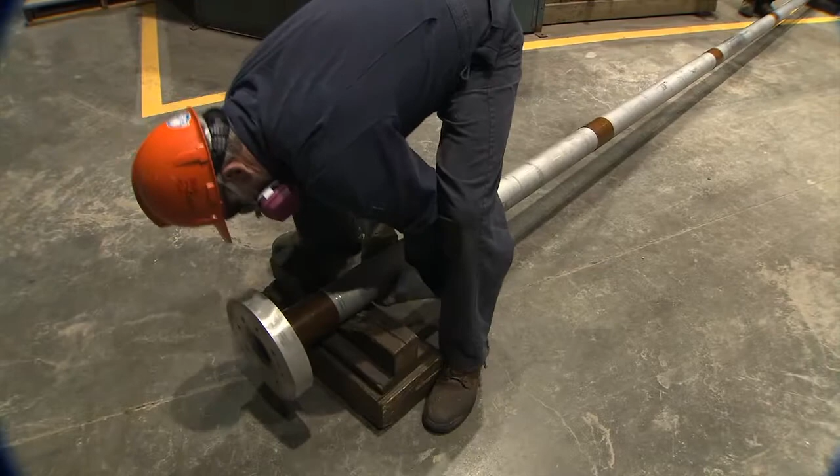When completely removed, place wooden blocks under the metal sections at each end to support it. Do not rest the core on a cardboard insert. Removing the lower porcelain insulator from the bushing.

Under normal operating conditions, all the parts of a bushing are held tightly together by downward pressure exerted by the compression system at the top. This downward pressure pushes on all the parts and squeezes them against the lower flange at the base of the bushing below the lower porcelain insulator.

Over time, the gaskets and seals that lie between the various parts can harden, which can prevent the parts from being easily separated. In order to free the lower porcelain that lies directly under the ground sleeve, it will be necessary to use an acetylene torch and apply heat to the surface of the bottom rim around the ground sleeve. It is imperative that a half-face air purifying respirator with the appropriate gas vapor cartridges, as well as safety glasses, be worn while using the torch.

During the heating process, the crane operator can place a stack of wooden blocks adjacent to the bottom end of the porcelain. Then, by slightly hoisting the porcelain, he can slide the stack of blocks directly under the end so that the porcelain rests on the block. As the heating continues, the crane operator can repeatedly raise and lower the porcelain to rest on the blocks. This process may be enough to break the seal where the heating is taking place.

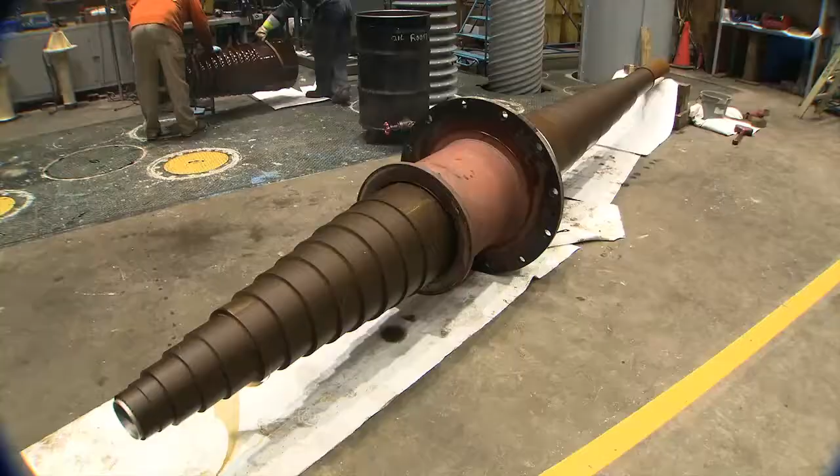Bring the unit to rest on top of sheets of oil-absorbent material that have been arranged on a section of the metal floor. Lower the hoist so that the sling choking the porcelain at both ends can be removed from the hoist hook, and attach the sling choking the very end of the porcelain to the hoist hook.

Slowly hoist the attached sling so that the narrow bottom end of the porcelain section stands upright and the wider top end rests on a sheet of oil-absorbent material. Two team members should be present to gently lower the unit to the floor when it becomes upright.

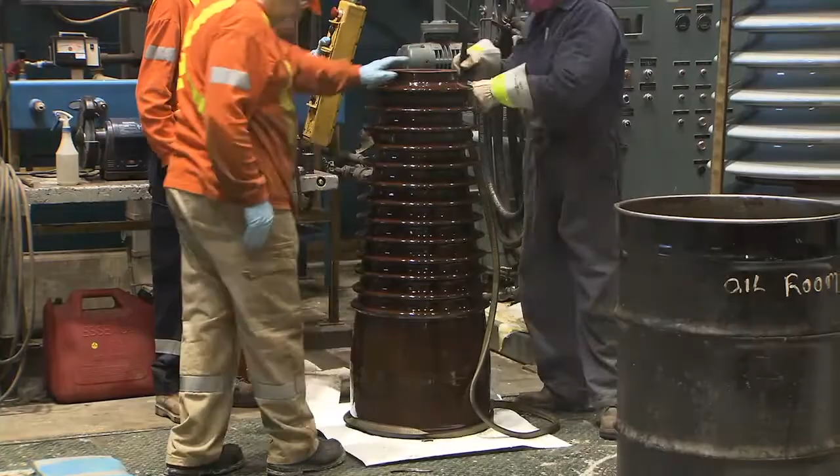Temporary reinsertion of the conductor core back into the bushing. Concentric rings of brown oil-impregnated paper insulation wound around the outer core are revealed when the lower porcelain insulator is removed from the bushing. Together with the foil condenser layers that are uniformly placed during the winding process, this material is known as the main insulation for the bushing.

The main insulation must not be exposed to air for more than 12 hours before the bushing is rendered unusable. For this reason, it must be immersed in the oil bath before that amount of time. In order to lift the remaining portion of the bushing into the oil bath, it is necessary to reinsert the metal conductor so that it is again supported on the bottom by the lower flange, and also because the large brass nut that screws on at the top can be used as a lifting point to choke a sling around.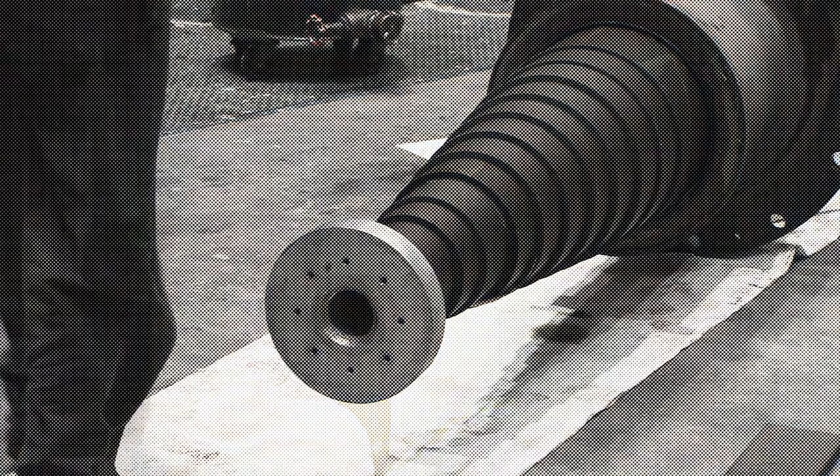Gently lift the top of the metal conductor core off the wooden support it is resting on, and carefully insert the top into the outer core at the bottom end of the bushing. Be aware that there are cardboard sleeves equally spaced along the length of the core. Each sleeve is about 6 inches in length, and all have a specific thickness designed to provide the correct amount of space between the conductor core being inserted and the outer core around which the paper insulation is wound.

During insertion, carefully lift each sleeve inside the opening to the outer core so that it does not get damaged and maintains its required thickness. When the conductor core has been completely inserted, attach the large brass nut at the top by screwing it back onto the threads. It may be necessary to wipe away any debris that may have accumulated in the threads during the insertion process.

When the nut is about 3/4 of the way to the end of the threaded section, wrap an oil-absorbent sheet around the threads below the nut before choking a sling around it. In this way, the threads are protected from any damage that could occur during the lift. Tighten the choke around the core and set the other end of the sling so that it rests on the core above the brass nut rather than on the floor.

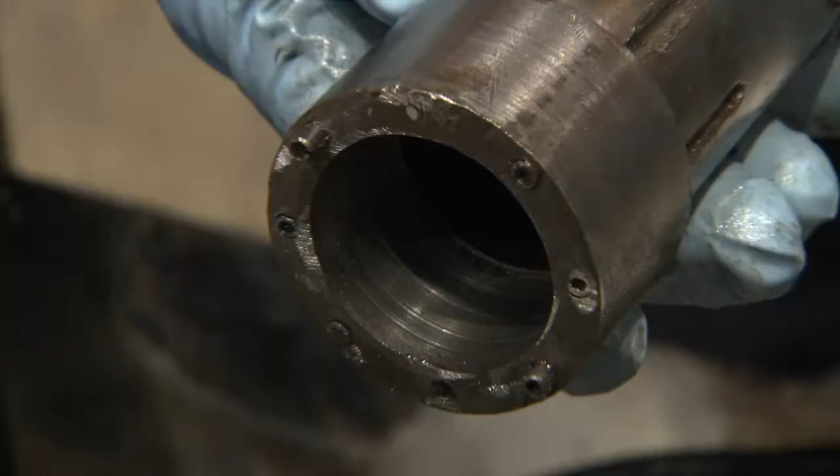To remove the insert, a special cylindrical pin wrench is used. This tool is basically a round metal cylinder designed to fit a circular channel with specific dimensions. The insertion end has pins that extend out of the bottom that engage with the object to be loosened or removed. Insert the tool into the port and gently turn it until the pins on the wrench engage with the pins on the insert below it.

Got to make sure we're getting it right. I think it's in now. Yeah. So we're just going to take a rod. Once engaged, insert a rod through the hole in the handle of the wrench, as this will provide a way to increase the amount of torque that can be applied.

While pushing down on the wrench, begin loosening the insert at the bottom. Loosen the insert until the capacitance tap itself becomes loose and can move within the port. And just check to see if it, yeah, you can see that they've moved, no problem, they're gone. Now we're going to see if we have a seal. It's still there. I'm going to open it up a bit more.

Over years of exposure to the elements outdoors, the oils and gaskets inside the port become hard, making it difficult to unscrew or remove the parts inside. Okay, that should be good enough for now. Now we're going to try this same thing, glue and, oh no. Yeah. We're going to need some heat.

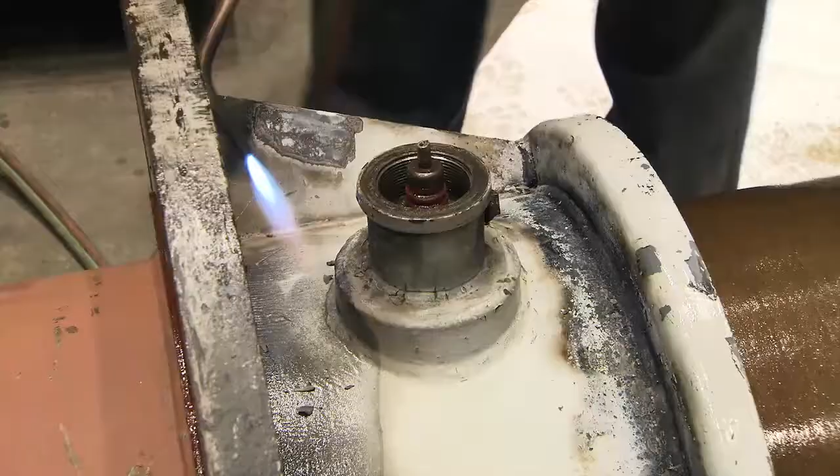In order to free the capacitance tap that is being held in place by the insert, it will be necessary to heat around the outside of the capacitance testing port using an acetylene torch. There's a number of gaskets, little tiny rubber O-rings in there, actually nitrile O-rings, and they have to be replaced. They've been in there for 40 years as well. It's all part of the gaskets and seals.

It is imperative to wear a half-face air purifying respirator with the appropriate organic vapor cartridges as well as safety glasses. After heating for an appropriate amount of time, determine if the capacitance tap will begin to move. Okay, let's give it a try. Insert a wrench handle in the port and leverage it against the port wall to apply pressure on the tap. There we go. That's good.

No, now we're going to spin this around a bit. Graham, do you have your other pliers?

When the tap moves, look for a small locking screw located on the side of a brass collar that sits on top of the capacitance tap, above a red porcelain part with concentric rings. This is a locking screw that holds the brass collar tight against the capacitance tap. Loosen the screw without removing it. When the screw has been loosened, unscrew the collar and remove it from the capacitance tap.

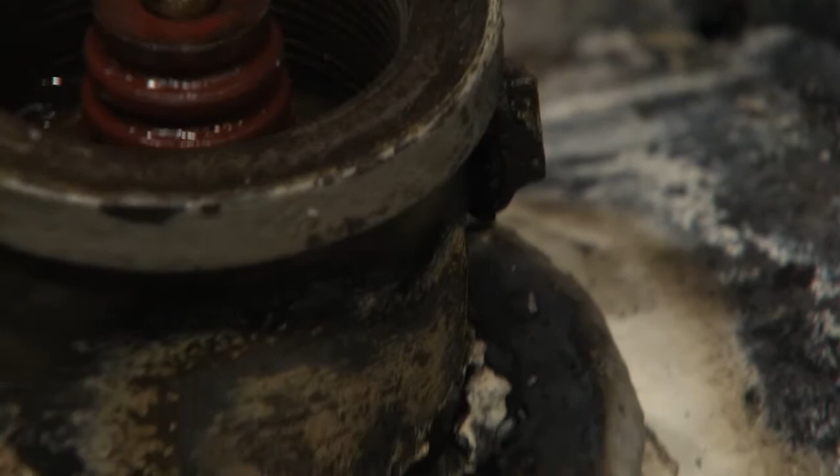Now, we're going to remove that big ring. And it's coming up slowly, but... Reinsert the cylindrical pin wrench and engage the wrench with the holes in the top of the insert that will be removed. Continue turning the wrench until the insert is close to the top of the port.

Okay. Remove the wrench and place the tip of a small screwdriver in one of the holes on the top of the insert. And there it is there. Use the screwdriver to unscrew the insert and completely remove it from inside the port. All right, Graham, there you go.

And now we're going to, use your other hand, please. Oh, now we're going to extract this actual part. We're going to pull it off and leave this pin behind. Pull upwards on the red porcelain part with concentric rings around it and remove it from the shaft of the capacitance tap. This part is symmetrical and has gaskets attached to both sides so that it will function either way it is oriented when it is put back in place.

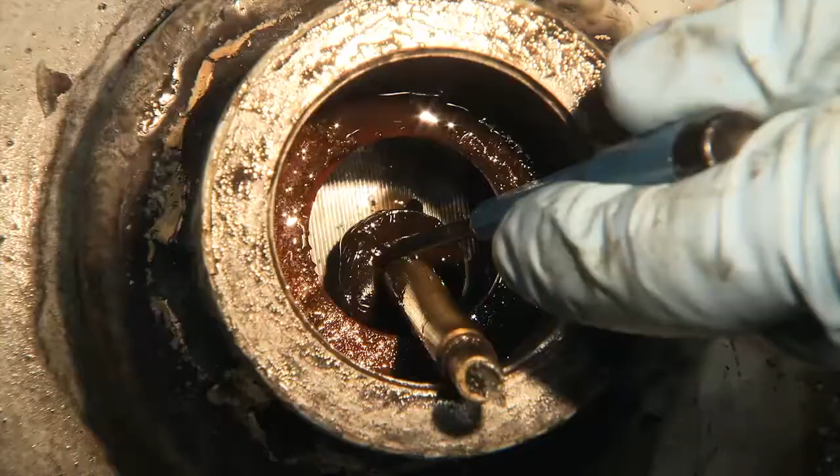All right. Okay. And again, there's gaskets on both sides of that, right there and right there. Hold it steady. Is that symmetrical? So you can put it in either way? It will work either way. Okay. And that is the gasket at the bottom of the cap tap probe. It has to come off.

It's made of nitrile. What sits on top of it? The ceramic or the porcelain part of the cap tap. Okay, sits right on top. Yeah. And that has to come off, right? That gasket's going to have to be replaced. How are you going to do that? Well, I'm going to extract that gasket and I'll make a new one and I'll slide it back over top of this probe.

Extracting it how? Just with some needle nose pliers or some tweezers. See that come out? Using needle nose pliers, extract the gasket and set it aside so that an exact duplicate can be made of it. Okay, there it is there.

Hold this light, James? Somebody? I'm holding the unit in place. Oh, I got you. Okay, give me that. Okay, good.

Submerging the exposed main insulation in oil. After the bushing has been disassembled completely, the exposed main insulation must be protected from air and submerged in oil until it is ready to be reassembled. Place a plywood board under the bottom flange of the conductor core at the bottom end of the bushing while it rests on the floor.

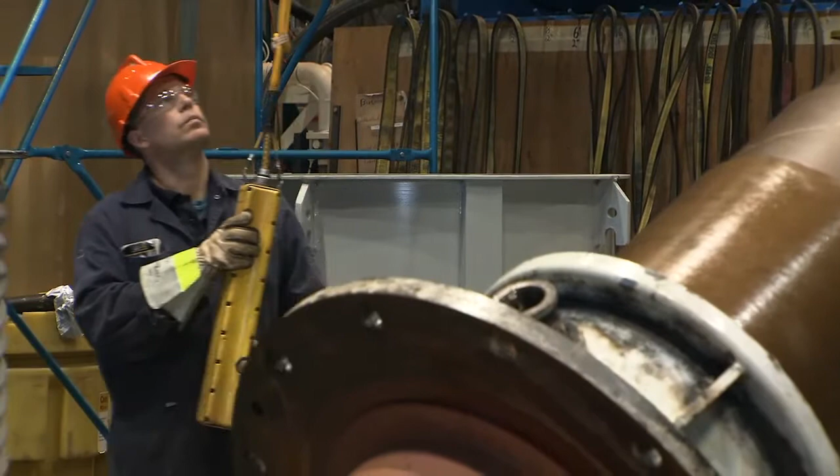With the sling that was choked just under the large brass nut at the other end, slowly begin to raise the top end of the bushing so that the bottom end remains resting on the wooden board. Lloyd, I'm just wondering, this is a 20-foot tank. What's the length from there? Continue hoisting the bushing to an upright position, keeping in mind that the oil tank it will be submerged in is 20 feet deep. Continue to raise the bushing upright while placing oil-absorbent cloths on the floor where necessary to absorb any oil that may drip onto the floor.

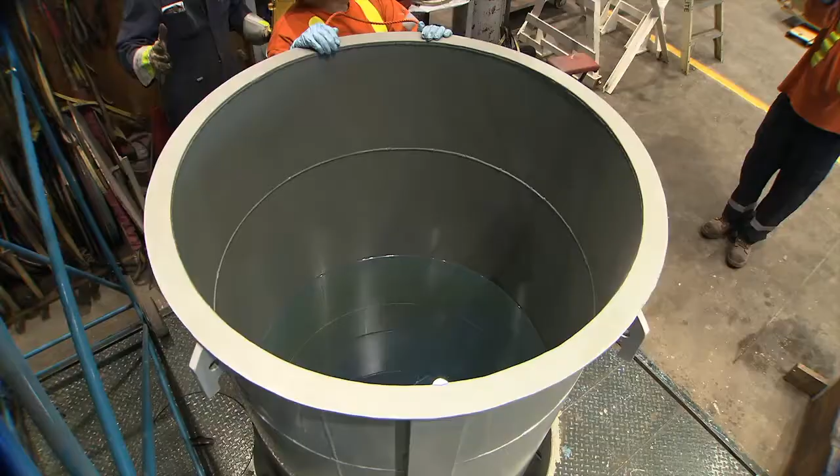As it is being uprighted, a team member should slide the bottom of the bushing while it remains on the plywood board to a position directly under the top of the bushing by holding onto the flange above the ground sleeve. Ensure that the small flange at the bottom remains on the board as it glides across the floor. Continue hoisting the unit straight up, and as the bottom approaches the oil tank, a team member should begin to glide it over the top of the tank by holding on to the small flange on the bottom. Begin lowering the bushing into the tank with a team member standing at the side of the tank.

As the bushing is slowly submerged in the tank, team members should ensure that the unit is centered and that as the large flange in the middle of the bushing enters the oil, there is enough space around the sides. 6 inches all the way around. Perfect. We're right dead center. Team members should also ensure that the level of oil in the tank remains low enough so as not to overflow as the bushing is lowered. Lower the bushing until it sits on the bottom of the tank.

Hopefully the tank won't overflow. We filled it up on Saturday. We weren't really sure how much it was going to displace. No, we're good. The oil level's about here right now. The core starts getting smaller now, so it's not an issue. Yes. At least up to the paper. We have to have it submerged up to the paper, but we'll probably send it right in, let it sit on the bottom. Oh, we're doing well. The oil's still at about this level. It's good. The oil's right here. It's not coming up anymore because now we're getting smaller again. That's it. We're 6 inches shy.

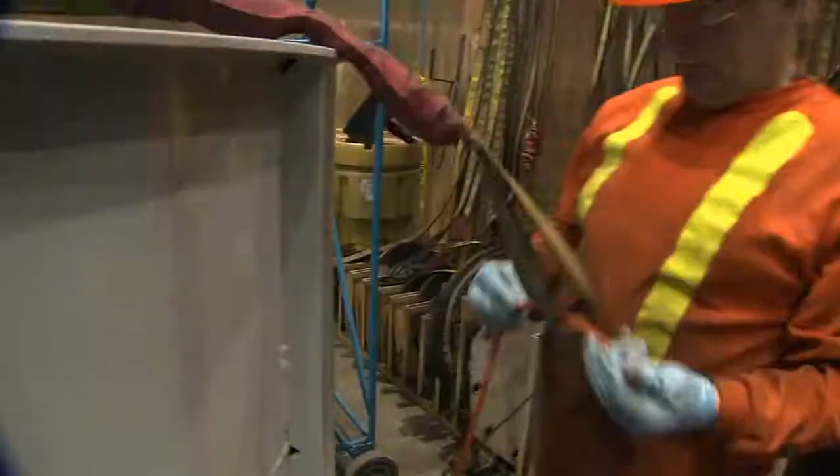Lower the hoist and carefully remove the sling from the hoist, leaving the other end choked around the large brass nut at the top of the bushing. And then we don't have to worry about it anymore. She's fine right there. We are good. Tie a cord through the loop in the end of the sling that was attached to the hook, and then secure it to the outside of the oil tank. This will prevent it from dropping into the oil tank. Yeah, it worked perfectly. We're just tying off the sling so that it doesn't drop into the oil. Okay. That's, yeah.